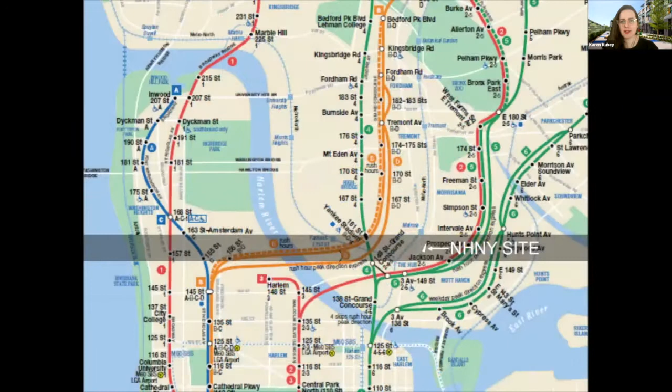So here we are, in the South Bronx, above Manhattan, and the site is by the hub, so it's very well served by public transportation. As you can see, I showed you a picture of the brownfield. It's this very long, narrow, triangular site.

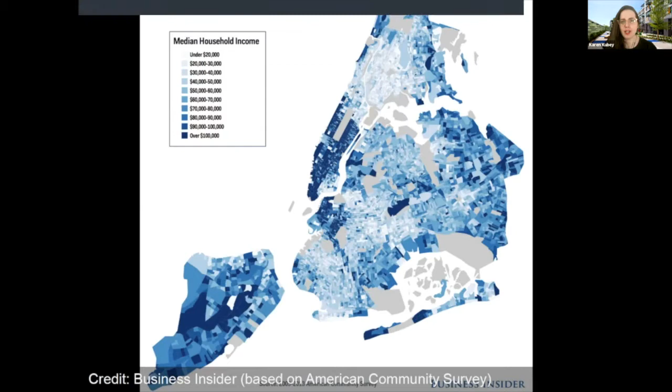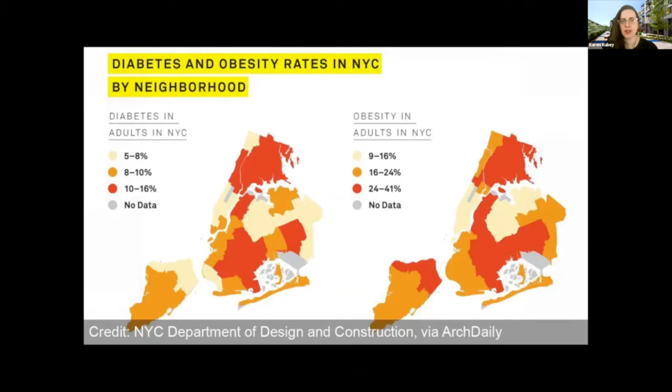And we're talking about health equity today. This is especially critical in this neighborhood. It's a neighborhood with low incomes and mostly people of color, unfortunately experiencing high rates of diseases like diabetes and obesity, and also seeing lower life expectancies than richer and whiter neighborhoods in New York. We know that the best predictor of our health is where we live, which is why it's so important for people involved in developing the built environment to focus on health equity.

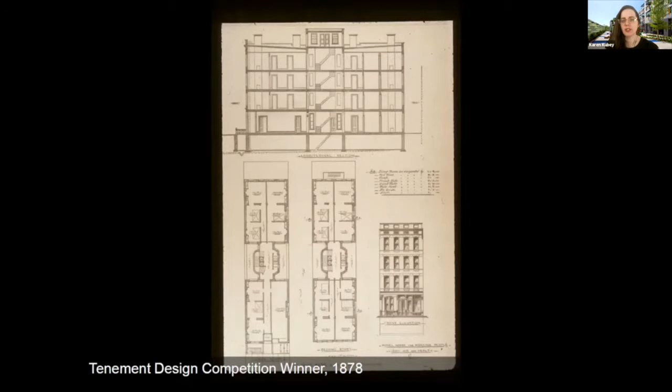So why did we want to do a design competition? We were inspired by an earlier era's health issues with housing and their successes. Looking at the turn of the century, you had overcrowding connected to diseases like tuberculosis. A famous competition, the tenement design competition, came around, and the result was this barbell, or dumbbell, tenement design, which let in more light and air than the previous standard of filling up the whole block. Importantly, this was not just a nice design that architects loved, it was built into the building codes, and it produced healthier housing for everyone.

So how do we center community needs in our process? We started by working very closely with the local community board in the South Bronx, conducting a series of workshops with people there, developing a list of prioritized community priorities. Those went straight into the RFQ, RFP, and those were the metrics that our jury used and codified also in the criteria I showed earlier. That's how the entries were judged - it said, okay, are these meeting the community needs?

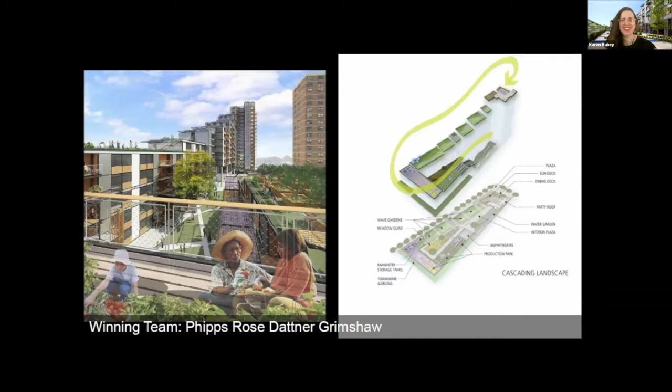So this is the winner, Via Verde, or the Green Way. You can see the basic diagram on the right and the idea of incorporating healthy food on the left. The winning team is, on the developing side, Phipps and Rose, and on the architecture side, Dattner and Grimshaw. But of course the story does not end here, because we've all seen competitions that have a beautiful winner and then you see the results and it looks nothing like it. So there was a ton of work to be done after the international search resulted in such a beautiful project.

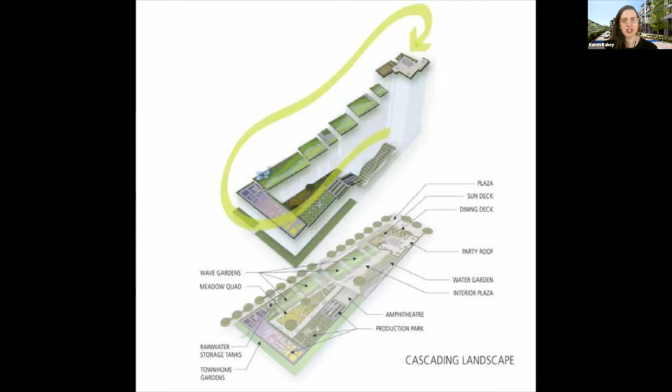This is a 222 unit development, a mix of ownership and rental, with the rental being 30 to 60% of AMI, and the ownership being 70 to 100%. Here you can see the main diagram for the Green Way, where you can step up from the courtyard and walk most of the way up to these towers, taking advantage of the sunlight. On the northern end you go all the way up to a 20-story tower, with green features like rainwater storage and gardens.

So we're talking about healthy housing today. What makes Via Verde healthy? Some of this is very basic and true of all well-designed, affordable housing. We know from better research that housing directly affects our health. Specifically, when people are provided with housing they can afford, meaning 30% of your income or less, and high quality housing, your mental and physical health improves, and you miss less school, you miss less work, you feel better.

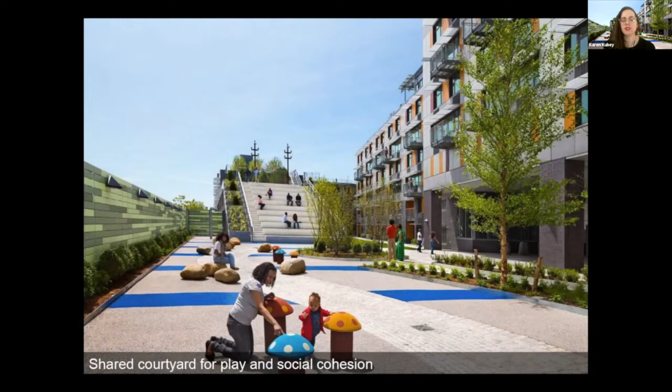But what specifically is going on with Via Verde? You have accessible green roofs, a gym, and community spaces for residents. You have a shared courtyard for play. We know that social cohesion is an important determinant of health. And you have a roof garden growing healthy foods. This is all in addition - the whole thing is kind of a piece of exercise equipment in a way.

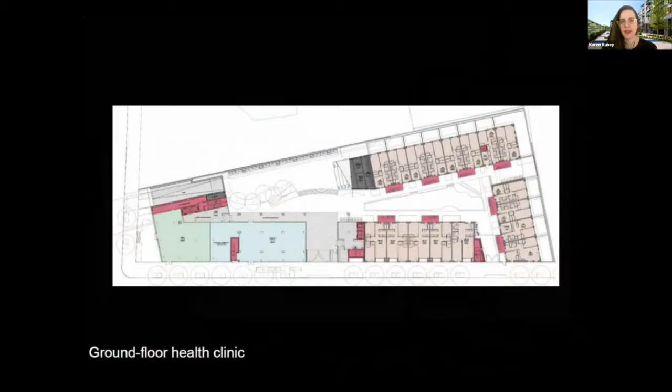Here's a shot of the ground floor plan. On the bottom left there is a ground floor health clinic. And at the level of the unit, you have apartments that have cross ventilation.

But the big question everyone asks is, yes, that sounds nice, Karen, but is it replicable? This is something I explore further in an article I wrote for Domus, also published in German in Bauwelt. I think it's really important to look at replicability in terms of the influences this project has had in different ways. This is exciting because if you remember, the goals were to be affordable and sustainable. The winning project went beyond our wildest dreams by showing everyone - and this was a huge lesson for me personally - how housing can be an intervention toward greater health equity.

So this became, importantly, in terms of influence, a test case for New York City's Active Design Guidelines, which originally came out in 2010, showing strategies in the built environment to promote physical health. This is a test case inspiring further work in tons of projects across the city since. Also, Enterprise Community Partners was a supporter of the project, and they are always taking inputs from their built work into the Green Communities Guidelines, which influences healthier housing across the country.

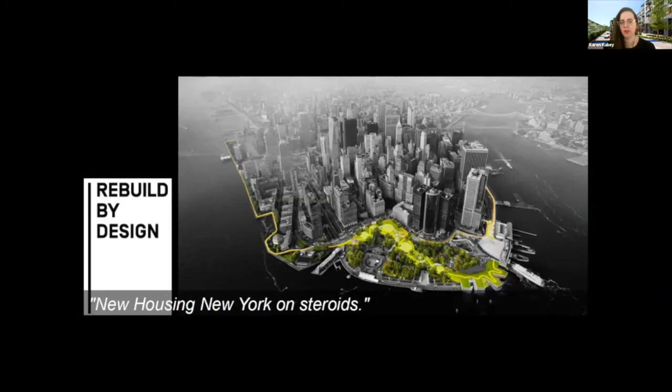In the image, some of you politicos might have noticed Shaun Donovan, who was then the head of the housing department in New York, also the head of the jury, who then went on to lead HUD under Obama, where he developed Rebuild by Design, which he called New Housing New York on steroids. So taking this design competition, another way it influences things at the national scale is to think about more ways for healthier building through design competitions.

And of course, we were very honored to receive a Silver Medal Award with the Rudy Bruner Award, and excited to see the work get out that way and influence people, subject of exhibitions.

There's a whole book on it that you can get. And this was really exciting.

Michael Kimmelman, in his very first article as architecture critic, features Via Verde. He's not featuring a fancy museum or a fancy rich person's mansion, but featuring Via Verde. And this isn't just an ego thing. It's really exciting to see more people talking about affordable housing and raising the bar. The public conception of what affordable housing should be is really influential.

And then what are other ways to think about replicability? I thought it was so interesting when I got to do that article, calling up people who had been involved and learning how the project had influenced their own work.

So Holly Leicht at the housing department noticed that, because it was a big, well-publicized international design competition, lots of architects who had never given a second thought to affordable housing RFPs suddenly knew about them and were signing up. So she saw a huge increase in the quality of design coming across her desk.

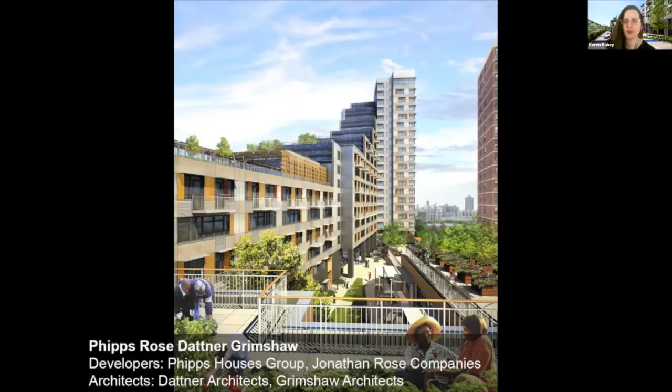And I'll end here. This is something that Via Verde for me was the first project that really opened my eyes to the connections between housing design and health equity, and something that I pursue in my teaching, professional, and editorial work now. So I'll end here by saying that ethical design for the most impacted by dual climate and public health crises must center their lived experience and cultures.

So thanks so much for the opportunity. I look forward to talking with my fellow panelists.

Thank you. And we've been reminded a couple of times through this series that sometimes you have to start something with a sense of passion, not knowing, as other people will try to tell you, that you're not capable of accomplishing the thing that you end up accomplishing and winning awards for. So it's a reminder to all in our audience that whatever people say that's not possible, in fact, it is often quite possible, and you should go for it.

Who's next? I believe it's me.

And I will share. You guys ready? Sorry, I always, it's like you get to see all my slides backwards when I don't have it teed up properly. Power of Zoom. You guys ready?

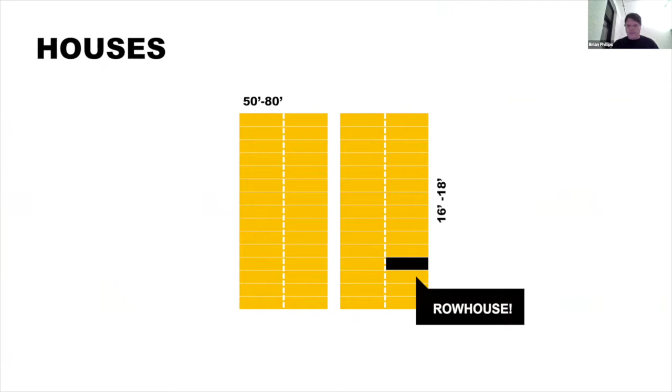Philadelphia is really a wildly row house dominated place with some 400,000 of them in a city of 1.5 million, and you do the math - many Philadelphians live in the row house.

What's interesting about it for us too is it captures a wide range of different kinds of people, backgrounds, incomes. The difference between being in a fancy row house or a modest row house could be 2 feet of width. There's a kind of common experience of living this way, which we found to be compelling.

So what I want to share today are a couple of examples of design of row houses, and then a grant project we did where we had a chance to dig in and talk to communities about the experience of the row house.

What's really cool, it was interesting, Karen, to see the Via Verde Plaza, because I started thinking row house blocks have that same space and it's the street. It's this sort of shared common space - as much as we're architects thinking about buildings, you can't get away from the power of the stoop and the sidewalk and the street as this commonly held living room.

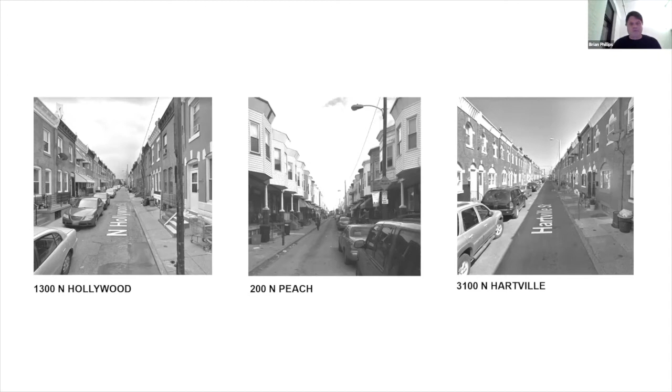There's just unending variety and interest from different eras, different kinds of developers that operated over the last couple hundred years building these blocks out. And you can kind of see here the way that these spaces get used.

In Philadelphia, if 3/4 of the residents agree they can close down their block for a block party permit, and pre-pandemic, in 2019 there were 7,000 such permits pulled over a 3-month period over the summer.

You get this sense of the kind of social connectedness, and the resulting healthy communities that really come out of the spatial typology, the walkability, the shared experience, the relying on your neighbor.

That's not to say that there aren't intense systemic challenges to a lot of people living in the city of Philadelphia, but the space and the typology of the row house we kind of hold on to as a real asset.

So I'm just going to quickly, being mindful of time here, go through some really quick row house experiments we've done. The first one being, I think, very much coming out of this idea of affordable and very sustainable. These were all projects we did with private developers, piggybacking on Karen's optimism that developers and architects can do innovative things if given the chance.

These houses, which were much smaller than what the zoning envelope would allow, were 1,000 square foot, LEED Platinum, $100 a square foot houses, admittedly built 2008, 2009, 2010 when construction was a little less expensive. But really starting from this idea of what's the smallest, most elemental house we could build.

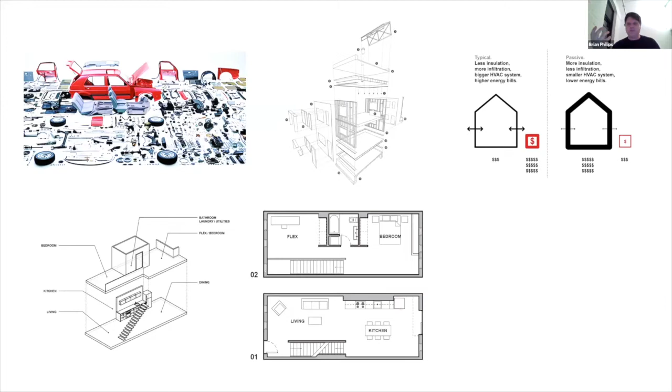This sort of not asking how do we make a cool, interesting house less expensive, but how do you start with this high performance type, and what are the design virtues, right? These houses were flat, very simple. We silk screened on this facade with an artist to create the architectural character, just really using what was at hand to create the building.

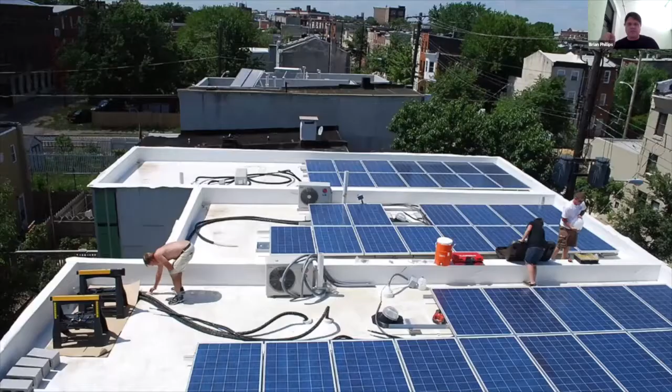This was actually the developer and his family - he lived in the first house and really believed in this vision. We did some half dozen of these original prototypes, and it has informed our work since across now Philadelphia, Detroit.

We did a project in Roxbury that came out of this fabric up in Massachusetts, and we've been working around the country with this ethic of learning the local place. You can see all 3 of these buyers rolled a PV array into their mortgage, which we thought was a really interesting commitment by young first-time home buyers and what their values were in housing.

More recently, and we've done many of those projects, we've been very interested in these sort of leftover sites that are too weird, maybe narrow, to develop in the first wave. Really, I think as an affordability unlock, it's how do you make the most of the fabric that's there, how do you make the most of the infrastructure that's there?

These next 2 projects are 12 feet and 11 feet wide respectively. This is a 12-foot wide row house. One of the funny things about this developer was when they bought the lot, one of those houses in the background asked him what he was going to do on it, and he said, build a house. And they said, how could you build a house? Because it's 12 feet wide, which new construction in Philadelphia is usually not seeking 12-foot wide houses. And the developer said, well, it used to be a house. And that's really kind of amazing, right? That this expectation of how we live has really changed.

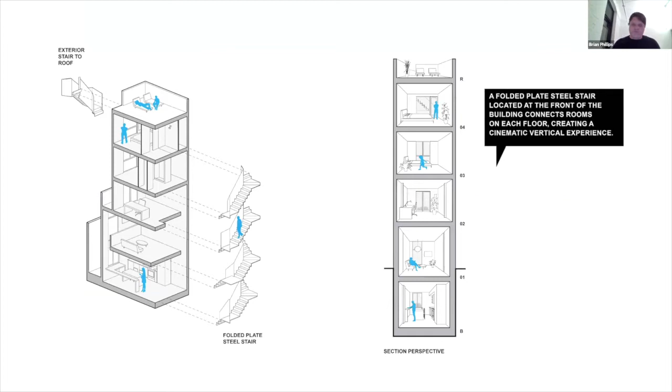This 1,000 square foot house really had to use the vertical dimension to its advantage. If you guys know what the Philadelphia Trinity is, which is this 3-story with a stair that goes back to the colonial era, we were really inspired by that. Move that stair to the front of the house, it almost becomes a big window shade where those windows in the front allow in light, and that stair twists up and serves each of the rooms, which are quite modest, but really builds off of that. You can kind of see here from the stair, one of those rooms.

Again, really finds the elementalness of what's given to you, which I think is a hallmark of the way that we're trying to solve for this kind of affordable and sustainable housing model, which is to make the most of the fabric available and also to take what's given. We're not always putting brick on these houses, we're not always trying to look like what's next door, because sometimes that can drive cost. We're really working to create novel, contemporary modes of living that really get at this sustainable, affordable model.

This project's actually multifamily, but I think it really acts like a row house. This was a site just off the Vine Street Expressway on the edge of Chinatown, an 11-foot wide site. This developer came to us saying, we think we can develop something here, and we actually thought they couldn't, and we had to do some real puzzling to figure it out. We're kind of happy we could.

I think that's something we've become interested in too, diving deeply into the zoning code and the regulatory framework to try to figure out how to get the most out of a site. It's interesting that when we did this project originally, the zoning code—Philadelphia has a very liberal parking requirement, generally never more than 3 spaces per 10 units, which is pretty good by urban standards. But this project was done during an early period of the new zoning code where they weren't requiring any parking until 10 units. Now they prorate the parking spaces. So this 7-unit project was as of right with no parking.

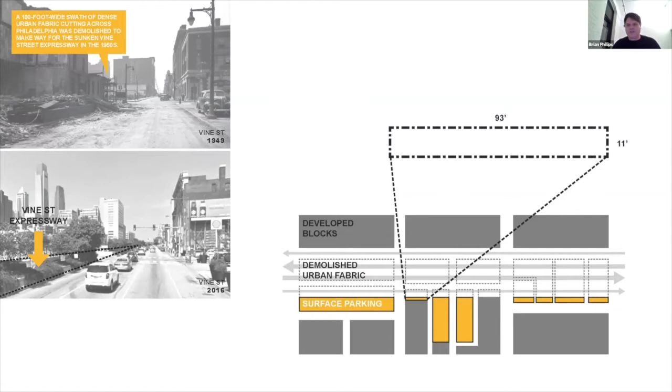These sites, and we may have the opportunity to look at some others, were the result of cutting this highway through and leaving these leftover edges. You can see our site, 93 feet long and 11 feet wide. We were able to use some of the affordances of the zoning code, like the bay window rule that allows you to extend 3 feet over the sidewalk, to capture some additional space.

So these 7 units, when you're inside them, really feel great. There's some volume here. We used a couple of mezzanine levels to capture additional space, and really you can see that top right shot—you can appreciate that 3-foot bump on the facade that adds that extra space.

Just some other images of the interior and the galley kitchen coming through the entry hallway. The secret to this design is really this single stair, which allowed for building at this scale. You can see the mezzanine levels there.

...the building code that change for different kinds of construction and different requirements, where you can match affordability with density, which is something we've become very interested in.

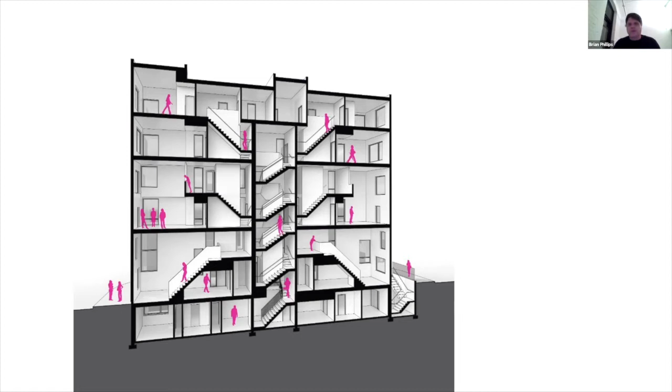And of course, in these single stair buildings, the stairs are important, so making sure that they're also social and interesting and inviting to people.

So you can kind of get a sense - it's right along the Vine Street Expressway, which is really quite interesting, the way that you interact with the traffic, and it's really kind of hanging on to the edge of Center City here.

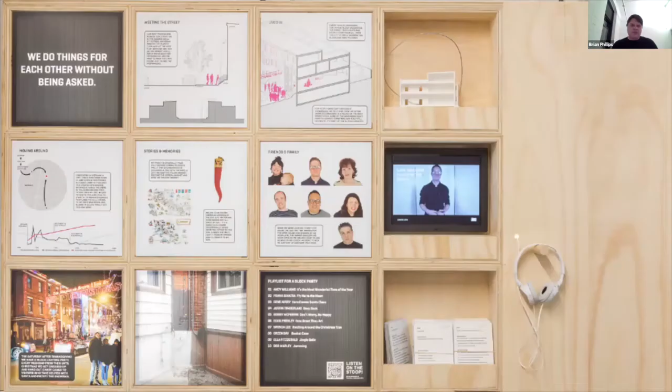And I think one of the things that I wanted to convey - we think of architects as sort of designers, but this idea, particularly in a city like Philadelphia, where there's a lot of as-of-right development, meaning it's a little different than Boston, where there's a little less oversight. The zoning code is celebrated for allowing a lot to happen on its own.

But what we've realized is that puts a lot of responsibility on the architect. We have a lot of tough conversations with clients where, just because you can do it doesn't mean you should, is something we've been saying a lot recently, and really helping them think through how their work shapes the city, because their work happens fast. While we're all thinking about how to rewire the top-down regulations of what's allowed, a lot gets built.

I just wanted to mention that Row House Workshop is moving to Appalachian State University - in fact, they came to pick it up this morning. And what's really cool is it's going to move to Boone, North Carolina, which is a very different context than Philadelphia. We hope to have some panels and discussions and workshops around what these 2 places can learn from each other and how communities are shaped.

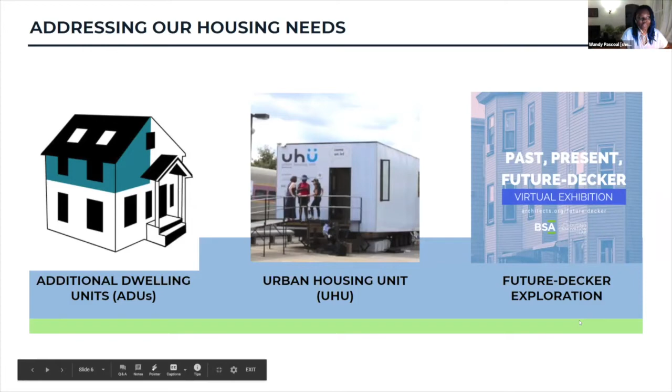First, starting with our additional dwelling unit program, then talking a little bit about our urban housing unit, and this entry point into a conversation around compact living in the city. Then finishing off with our Future Decker exploration, which I think you'll see direct parallels to the work Brian was mentioning with the row house workshop. Excited to have that more expansive conversation as well.

So to begin with our additional dwelling unit program: here is an opportunity to really think about different ways of bringing housing into the city, and leaning into processes that folks had already been doing prior to our introduction into this. We knew there were a lot of units that weren't necessarily regulated, but were carved out of folks' homes. We then decided to start thinking about how we can facilitate the process of creating an additional dwelling unit, and looked at this particularly within the building envelope.

So thinking about how folks might be able to transform their attic spaces, their basements, or carve out a unit on a first floor, but also thinking about pre-existing units that already exist, and converting them into truly habitable spaces as well.

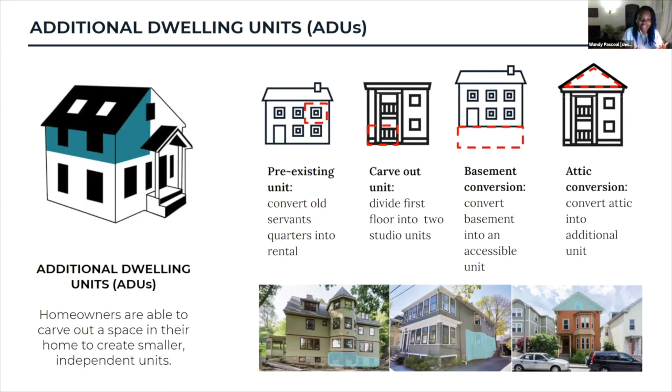We ended up listening and paying attention to what folks were already doing and already asking for in the city, then trying to partner with architects and other designers to think about how we can achieve some of these goals and start to create guidelines that are easy to follow. Quite early in the process, we actually connected homeowners with designers to sit down and brainstorm these different ideas of how they'd like to see their spaces transformed, thinking about how they can bring an additional unit for extra income, or to age in community in their homes, and how these different services can be provided for them.

Today, our additional dwelling unit program is now citywide. We had initially started with a pilot in three key neighborhoods, but it's now gone citywide, and we're thinking about expanding beyond just the building envelope to exterior existing structures like carriage houses, leaning into and learning lessons from our neighbors across the United States and numerous other cities, and how they've been able to create additional or accessory dwelling units as well.

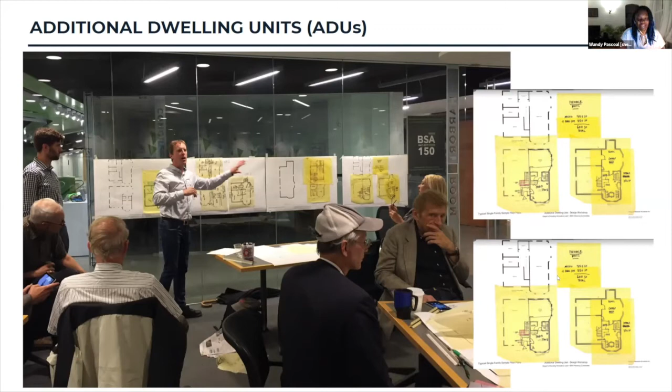The other project I wanted to briefly highlight was our urban housing units. Here was an opportunity to start unpacking the potential benefits of thinking about smaller living spaces in the city, and asking ourselves: can smaller units be made feasible in the city as well? And thinking about how we create guidelines for these in different ways.

I'm always so skeptical about playing videos while on Zoom because the sound is just always hard to follow.

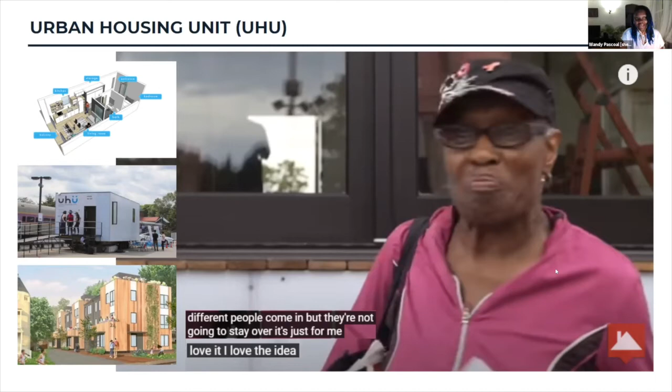Lastly, I'd like to talk a little bit about our Future Decker exploration. We were incredibly inspired by ISA's work with the Philadelphia row house, recognizing that there are a few challenges that exist when we're talking about creating multifamily housing here in Boston. So we looked in our own backyard and examined what is a building typology that has had a similar connection to a lot of folks, that is vernacular. Although colonial, it's still vernacular to this area.

We began to host community conversations with folks to hear about their experiences living in triple deckers, and getting a sense of this once deeply affordable housing type that was also inviting a large number of immigrant and working families, providing them an opportunity to call Boston home, and thinking about how it's quite difficult to afford a triple decker today, and how it's difficult to transfer some of those same values into our current context.

In these conversations, we not only asked folks to reflect on their experiences with triple deckers, or three deckers, or three families—there's a huge variety of ways to call this building type—but also asked them to envision the future of this building typology, which is why we leaned into naming this project the Future Decker Project.

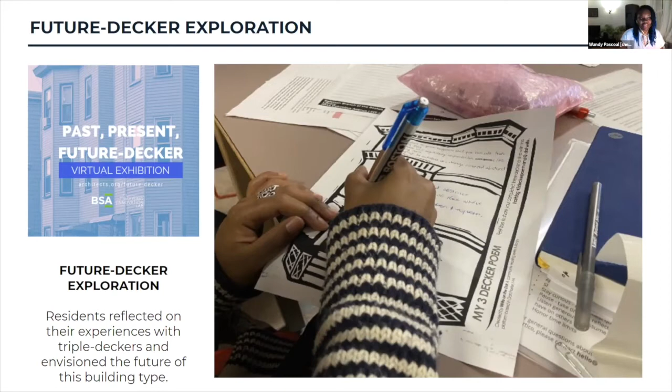We documented and truly partnered with incredible partners, including Wentworth Institute of Technology, where the students ended up creating their designs for the Future Decker. We partnered with a number of residents throughout the city's neighborhoods and had one-on-one conversations or group conversations with them about their experiences and their visions, and ended up documenting all of this on a virtual exhibition.

I feel like last year definitely threw us all in completely different directions than we were expecting, but we found a way to continue to stay engaged with folks and share out what we were hearing as not only needs of our city residents, but also the wants. Recognizing that the triple decker was a building typology that a lot of folks said would be really interesting to consider for the future because of their iconic balconies, and how you're able to live in walkable neighborhoods, and just thinking about the housing types that we can continue to create.

We also held a conversation series as part of the programming for our virtual Future Decker exhibition. This was an opportunity to bring additional folks in to have a conversation about the environmental impacts of triple deckers and potentially future deckers, and of the economic realities that are layered onto this as well.

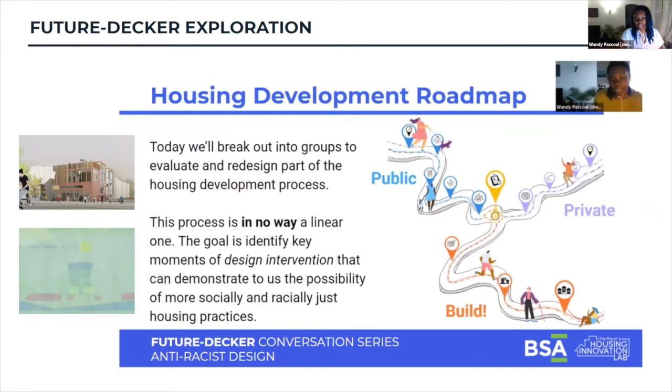Whether it's the ADUs or the urban housing units or the future deckers, there's something truly to be learned about our vernacular practices. I want to end with this final question that can lead us into discussion: how can we continue to learn from our vernacular past, our present, and our futures to really advance housing for the health and well-being of our communities? Thank you.